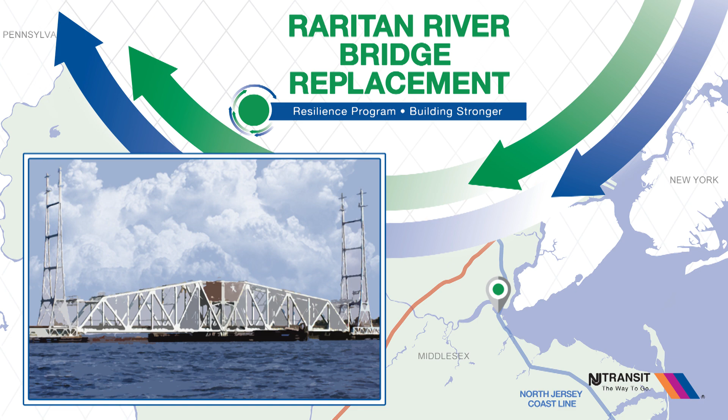The replacement of the Raritan River drawbridge is one of the 5 New Jersey Transit competitive resilience projects. This project is being funded in part through a federal grant of almost $450 million.

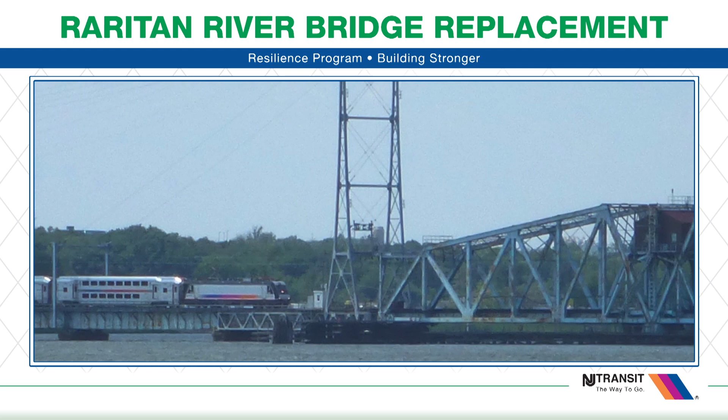The bridge was built in 1908 and spans the distance between Perth Amboy and South Amboy, about a half-mile from where the Raritan River meets the sea. The bridge provides the most important rail link for 17 of 20 North Jersey Coast Line communities to the job centers of Newark, Jersey City, and Manhattan. And in the summer, it connects thousands of people to the beaches and attractions of the Jersey Shore.

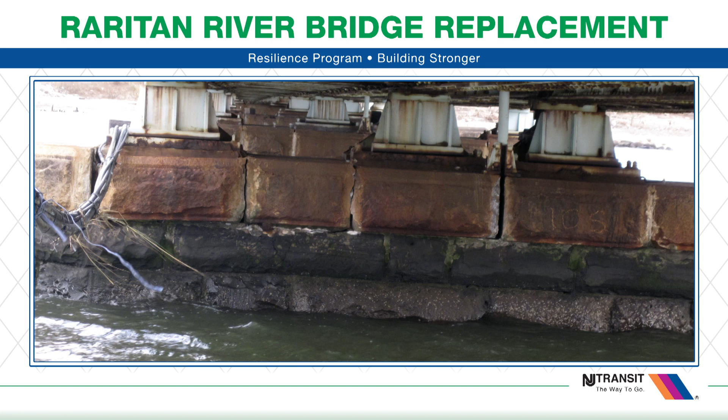For over 100 years, the bridge had stood strong until Superstorm Sandy's driving winds and relentless surge shifted the train track and wore away the piers upon which the bridge stands. Similar to storms' impacts on many of the North Jersey Coast Line bridges and crossings. Meeting the challenges of future weather events required new thinking and a determination to building stronger.

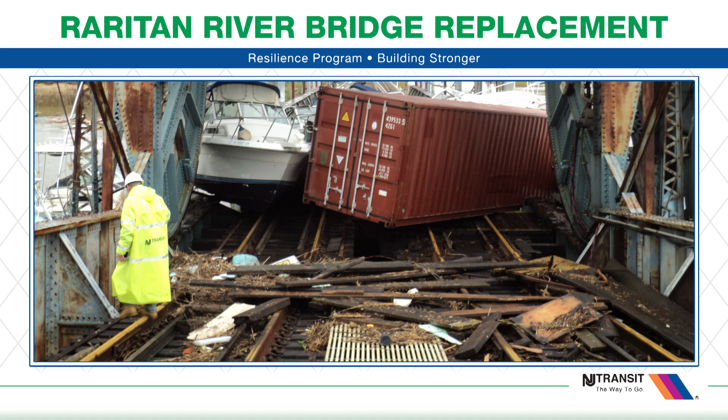Designed to resist wind and surge, the new Raritan River drawbridge will maintain the vital rail link upon which thousands have come to depend. One design under consideration is a lift bridge, where a section of the span is raised above the river to allow for passing commercial and recreational vessels.

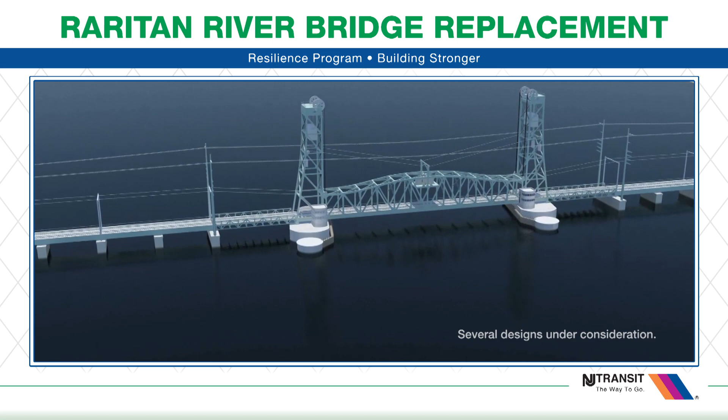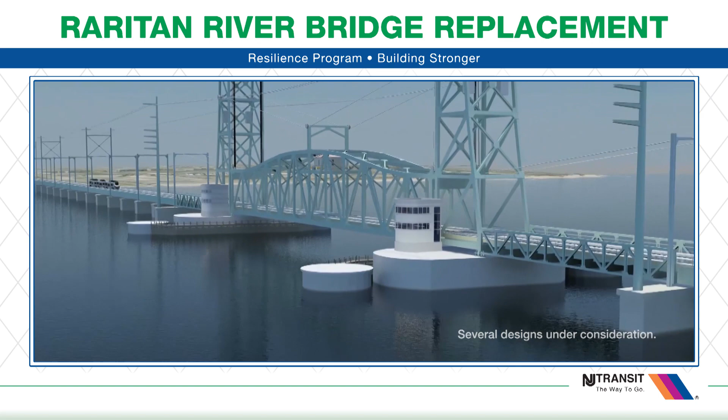Another design under consideration is a swing span. It allows for river navigation by having a section of the span pivot perpendicular to the structure to create an opening. Each design has advantages, and the final selection will depend on which is most effective for rail and river traffic. The project will require National Environmental Policy Act approval and will take approximately 6 years to complete.

We'll also be working closely with our partners at the U.S. Army Corps of Engineers and the U.S. Coast Guard. Our goal is to build a new Raritan River drawbridge with minimum impact to the environment and river traffic and a maximum benefit to our customers and stakeholders.

It's wonderful to be involved in this program. This is something that's going to stand the test of time, and that you can look back on and say that you played a part in. And so it's vital to our customers, to our company, and to the region. So it's very exciting to be involved in this program.